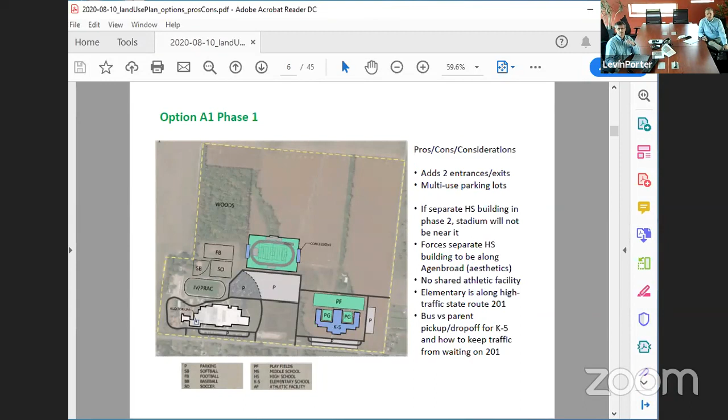The 3 main elements we're looking at in all of these are the K5 school, the stadium, and whatever future area is left over for potential development and/or buildings and athletic facilities down the road. So this is the one where we're putting the school on the northeast side of the site, with a centralized location for the stadium near the existing high school and middle school, and expanded parking. This would be phase 1.

Going into the A1 phase 2 - well, phase 1 you have to remember is basically 10 years. If we get funding in 6 or 7 years, it takes a year to design and 2 years to construct, so you're really looking at 10 years out before you get to that second phase.

So realize when you're looking at these, this is the plan for the foreseeable future, 10 years out. The master plan that shows the high school right now, we wanted to show that as a potential option, just to make sure that if the master plan changes from its current plan of 2 buildings, a K-5 and a 6-12, that we haven't done something to the site that prevents that future high school building from potentially being on site. That's the line of thinking when we're doing these.

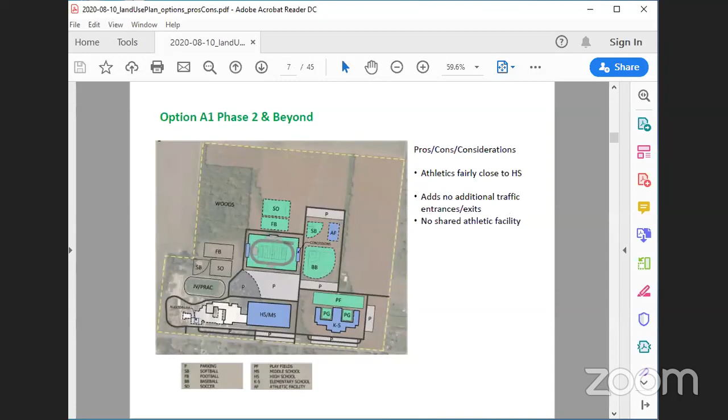But I'm just saying the comments are written a little differently, because putting the concession stand on the end of the football stadium didn't always make it common to the other sports. So the comments are just written a little differently. I just wanted people to know we used the AF box in two different ways.

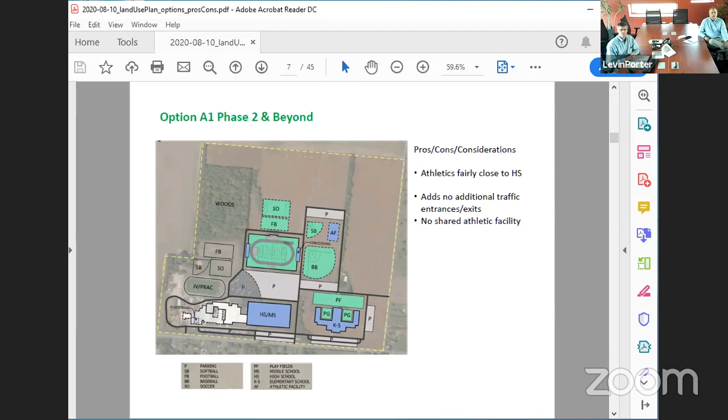Let's look at the A2 scheme. This is the third option master plan, a 3-building scheme. We're showing how the site would work if the high school is located on the northwestern side of the site, still maintaining the elementary school on the northeastern side, and changing the addition at the existing building to the middle school addition, which matches the master plan. So this just shows that no matter what you do in this particular scheme, you still have room to develop the site if the master plan changes down the road.

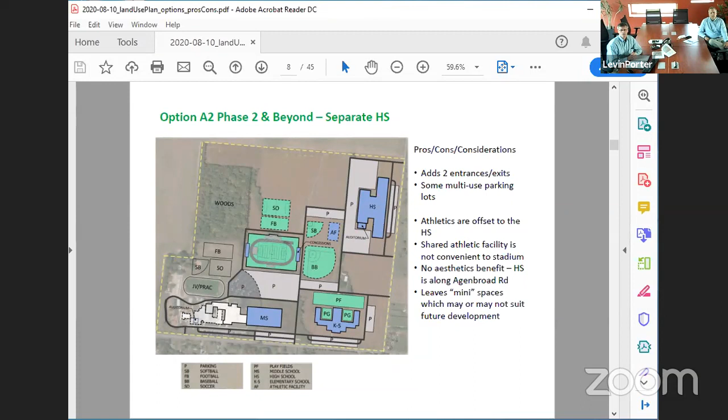Any comments on that one? Okay, let's go ahead and look at the B1 scheme. Did you want to talk about any of the pros and cons we have there, or?

I guess in looking at some of these, like A2 phase 2 and beyond, if our intent is to have our high school soccer team play on our football field, we're going to have 2 soccer practice fields, 2 football practice fields, 2 softball fields. My question would be, why do we have so many facilities? Softball, we don't even have a JV team. Soccer, I think only one of our 2 varsity sports is having a JV team this year, not even 2. But why do we have so many practice fields built in? It seems like a waste of space and money to me.

Well, I think those were put in there as a potential future, just to show there's space to do those kinds of things, and potentially moving them from where they are now so there's a central athletic complex, if you will. I was just looking at it because it still shows them in the existing locations as well. Yeah, that's why everything with a dotted line in that picture is just future. Okay.

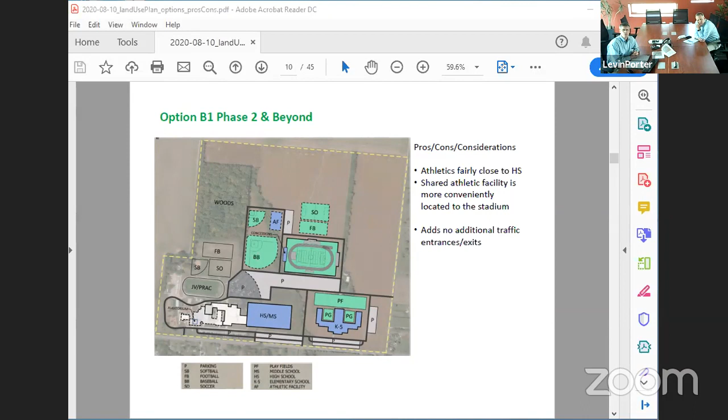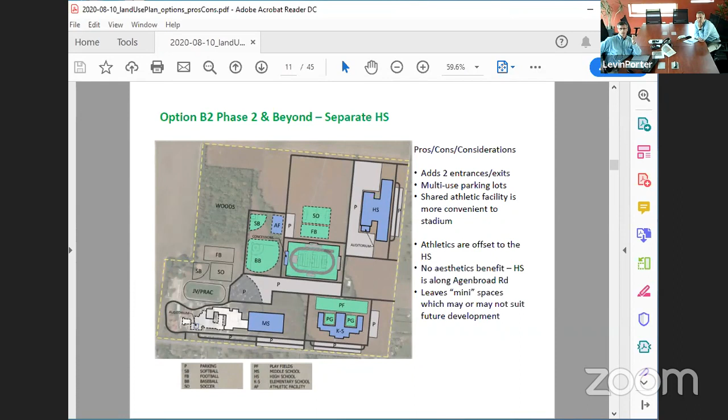So going to the B2 scheme, this one shows essentially that third master plan, high school up in the northwestern corner. Really the only difference is that the stadium has shifted further north, closer to that potential high school up in that northwestern corner. Let's go to the next one.

So the C scheme shows again the stadium, which would be on the corner of Agenbrod and 201. So we're really shifting that one as the focus of the campus. Then the elementary up on the northwestern side, accessed by Agenbrod.

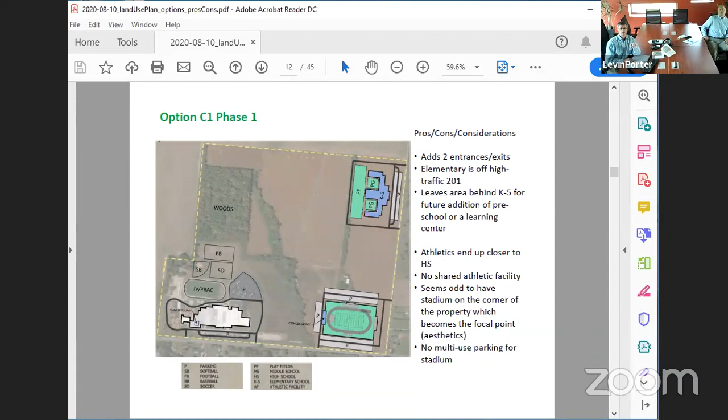And just to understand, this would be what would be on the site for potentially 8 to 10 years until the state funding would be available. As a planning exercise, it really isolates the elementary, which could be good or bad, but shows you what would be on the site for 10 years. As we go to the phase 2 drawing and develop the addition, let's go to the next slide, Brendan.

As we go to the phase 2 drawing, this adds the high school, middle school addition. We still have plenty of room on the site. We're adding the potential future athletic fields in there. There's plenty of room for that.

And then going to the next slide, Brennan, which would be the high school, there's still room to develop the high school. It's a little bit tighter on the site than some of the other schemes, but we could still take some of that parking out if we needed to build an addition onto that high school. We also have additional room down by the middle school for future additions as well.

In fact, all of these schemes are large enough so that we can accommodate some future growth in every one of these buildings. Some are better than others. So let's go to the D1.

Mike asked: if the elementary school's first and it's back in the corner, in the northwest corner, won't that increase the cost for the first project?

It could potentially increase the first cost. What we don't know is what the traffic impact would be on Agenbrod and how much we would have to do to Agenbrod to accommodate that traffic. And looking at the site utilities, I really need to dive into that and figure out exactly where the main lines are. I suspect everything's out on 201, so there'd be some additional development costs related to that.

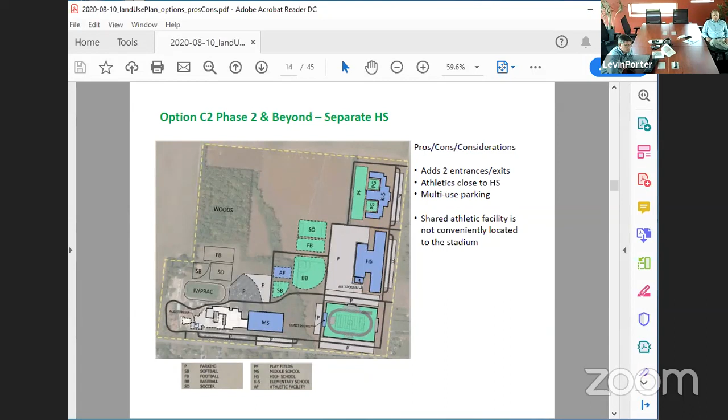Yeah, for the high school. Sure. Yeah, I mean that's a good point, and part of these schemes are to kind of explore all of those different options. There would be, even in this concept, a drive that comes from 201 that you could access to the back of the high school.

That goes along the south side of the stadium. So I think in all these concepts, you'll see that we have access from both Agenbroad and 201 really going to all these sites, because you really want both opportunities to get access to the sites.

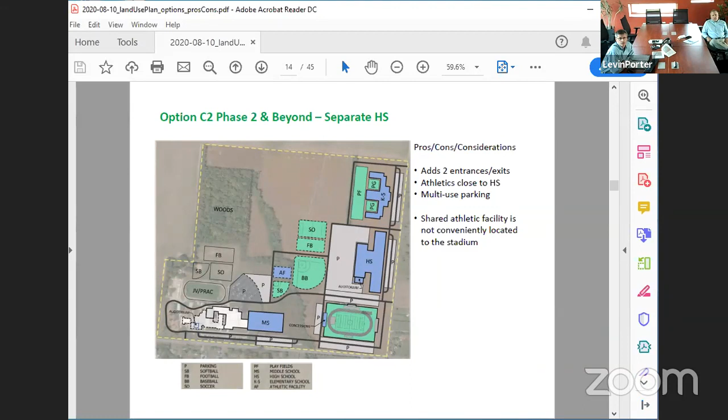Okay, let's go to the D1 phase 1 scheme. So looking at this, we're moving the stadium more centrally located. And this one really impacts the next phase.

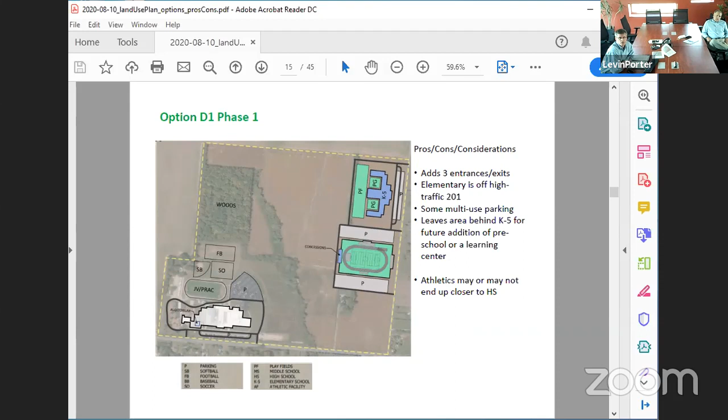So going to the phase 2 drawing. Brendan, can you go to the phase 2 drawing please? Thank you. Our athletic facility built around the stadium. We've got the high school, middle school addition, still kind of centrally located. The stadium, obviously, next to the elementary school. That's something that we need to think about.

And then going into the D2 plan. This shows the high school on the corner of Agenbroad and 201. So this, Lori, might address your comment there, because you've got more direct access to the high school from 201. And there's still room to kind of grow those buildings if needed.

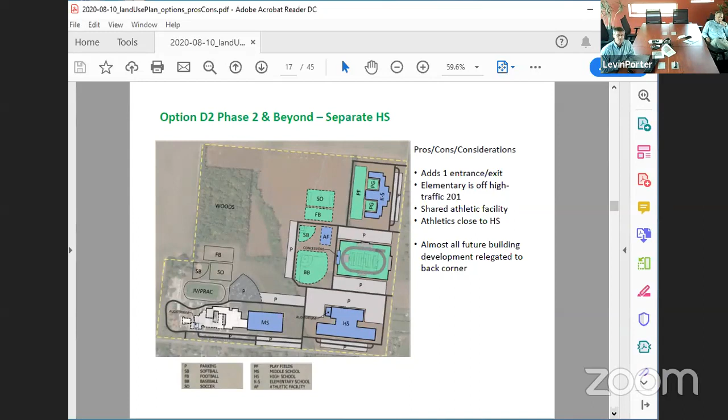So let's go to the E1 phase 1 scheme please. So this puts the elementary kind of back at the northeast corner with the centrally located stadium, or just kind of flip-flopping those two. And then going into the E1 phase 2 drawing.

Go to the next, there you go. Again, we're showing the athletic facilities being developed around that stadium. Lots of circulation, but again, we still have the elementary school on that northeast corner.

And then going into the E2 scheme, showing the high school all the way up there on the north side of Agenbroad. So this is kind of one of those issues that you've got to think about. There's less of an access point to 201 with the high school up in that northwest corner.

So Lori, this one probably wouldn't meet your requirement there. And I would agree with you. There should be some sort of direct connection to 201. So that's the E2 scheme.

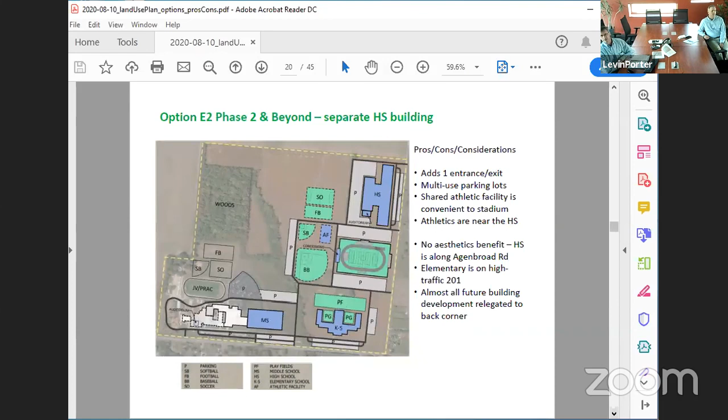And then going to the F1 scheme please. Thank you. This one has the elementary all the way up in the northwest corner, centralized stadium. Going into the phase 2 drawing.

Yeah, next, there you go. Continuing the development around that stadium with the sports complexes. This shows the high school, middle school addition, the additional parking there.

And then it's kind of bisecting the site. So you've got the corner at Agenbroad and 201, and then you've got the area behind the woods and to the west for any future development. You could do a new building back there.

Going into the F2 scheme, this shows the high school again on the corner of Agenbroad and 201. So we've got more direct access and visibility for the high school at this site. You still have room to build, even in the area between the K5 and the high school in this site.

You still have room for another building. And you still have tons of room in the back for development. So this is, again, it's a pretty flexible scheme.

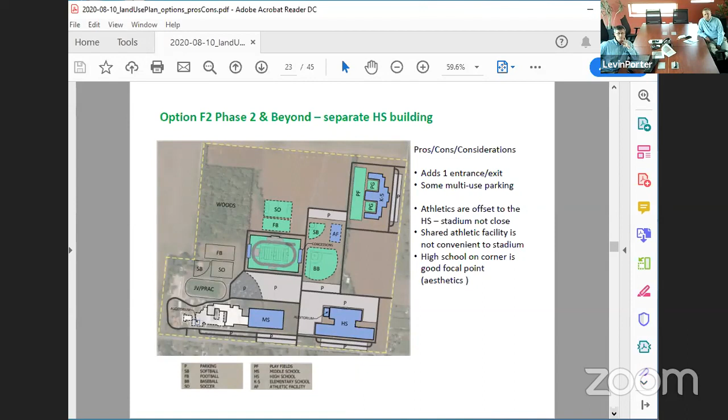Going into G1, these are schemes that were developed by Chris and Julie, and I think just kind of looking at other potential options. Chris and Julie, I didn't know if you wanted me to go ahead and describe these, or if you wanted to talk to them. Go for it. Oh, go for it.

Okay, so here we have the stadium kind of still shoved a little bit north. And if we go to the phase 2 drawing for G1, again, the athletic facilities developed around that stadium. We've got plenty of future growth for the high school, middle school addition.

And then the corner of that site would be reserved for any potential high school if the master plan changes. And again, the west side of the site is still open for development. So going to the G2 drawing, there's the high school and how it would sit at 201 and Agenbroad. So I think there's plenty of access for the stadium, plenty of access for the high school, and plenty of room for future development.

Going into the H1, this puts the elementary school all the way back by the woods. The issue that I think we're going to face with this one is the development costs. This is basically almost 1,500 feet from Agenbroad and a little bit more from 201. So I think the development costs related to the utilities is no small factor for placing the elementary school here.

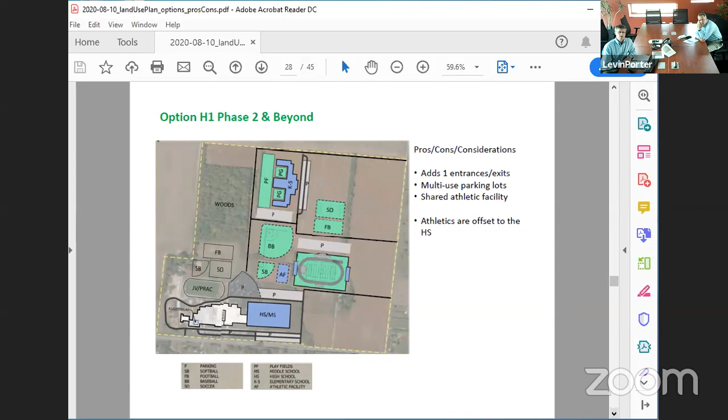We've got plenty of room for development on the north side with the high school and middle school addition. Going into the H2 drawing, that would be the high school again on the corner of Agenbroad and 201, which leaves enough room on that northwest corner if that wants to be developed, or if Julie has some land use studies for a possible sale in the next few slides.

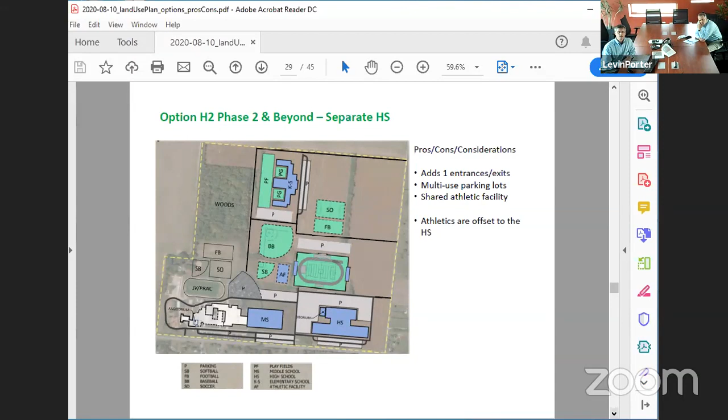Going into the next slide, this is the I1, phase 1. This puts the elementary right on the corner again. The stadium's moved a little bit further to the east on the site. Lots of room between the existing building and the elementary.

Going into the phase 2 drawing, continuing the development of the baseball fields, the softball fields, potential athletic facilities around that stadium, with the high school kind of smack dab in the middle between the middle school and the elementary school.

This one is a little bit tight. When we put all of that stuff along 201, I think we really need to consider carefully any potential future growth of those schools. There's a little bit of room to move, but not much. So for this particular scheme, I think that it's a little bit cramped and may not be as flexible as some of the others.

That's an interesting question at the end. Can you tell us about that? I'm sorry, can you repeat that, Danny? That's an interesting question on the bottom of the previous slide, wonder if you could tell us about that. If we connect the middle school and the high school with a hallway, does it count as one building? Yes, it would count as one building.

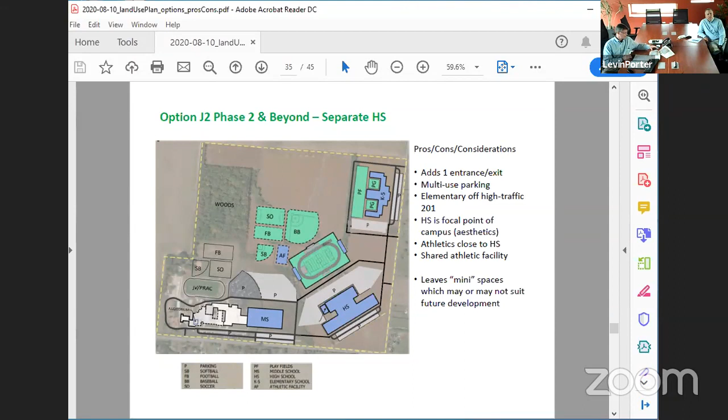Excellent. Yeah, I think the next slide is related to the land use. Julie, you want to talk about it? Yeah, I'll do it.

Okay, so this came up a bit - if we want to set aside some of the land to potentially sell it in the future to fund some projects. Not saying you have to do this, this was just to create a visual to show you what it could be like. So here's some of the statistics.

This is current information. Currently, the zoning requirements, you have to have 175 feet of road frontage and a 2-acre minimum. That's for any property with a septic. There is what they call planned development, where it doesn't have to be that, if a developer would come in and put in streets and water drainage and everything, a way to handle the sewage and the water and everything.

So it'd be similar to the carriage trails thing, right? Then the requirement goes away. But this is for a house with a septic system. So minimum size 2-acre lot with 175-foot road frontage would be 498 feet deep.

So according to the Miami County website, the Agenbroad Road frontage is about 2,560 feet. So if you divide that by 175, you can get 14 lots along there with 110 feet left over. Not to say maybe you wouldn't put 14 in there or sell 14, because you might want to have some roads, or maybe they could be put in the 110 feet. So again, this was just in case, in the future, we didn't want to prevent the option, or just to leave open the option of possibly selling it.

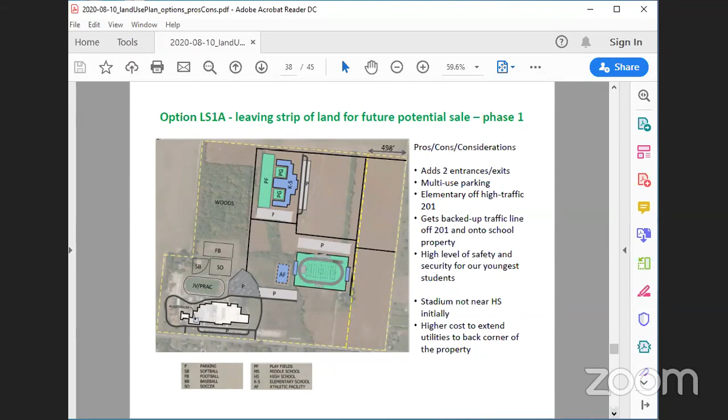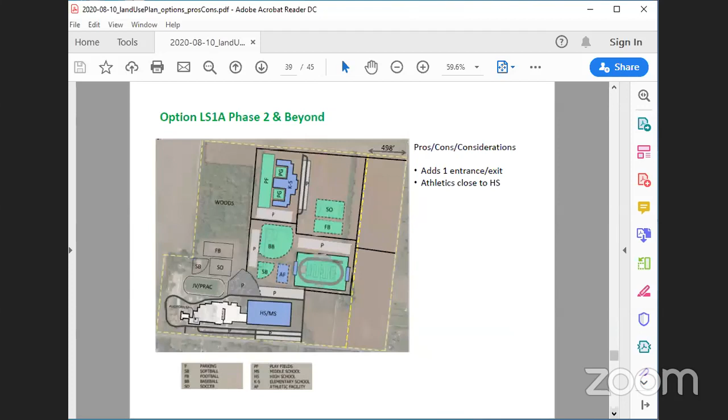So this first option was putting K through 5 in the back, and then go to the next one please Brennan. Stadium in the middle - this kind of mimics the first couple that they showed where the athletics are in the middle, it's just pushed back off of Agenbroad Road. And if you go to the next slide, it would mean putting the high school in the corner on this particular drawing. And then there's a couple more options.

The next one is moving the K-5 up to where it would not be road frontage, it would be probably the back of potentially some residential. Just so you could see how things fit if we did take that, or if we did leave that land empty for now. And if it was never needed for another project, we could also do future development or athletics on that particular space.

And just so you know - did you get the numbers for this? So the land today is selling for about $40,000 an acre, which would be around 1.1 million at today's dollars. So the block of land that's blocked off there, that would represent that amount. Could go up - well, we figure land's going to go up, right?

So this design here was changing the elementary to face inward, rather than the back, if it was sold it could be the back of a residential section. So just changing it to overlook the campus rather than the backyards, with a potential future building next to it. So again, just to show some different options.

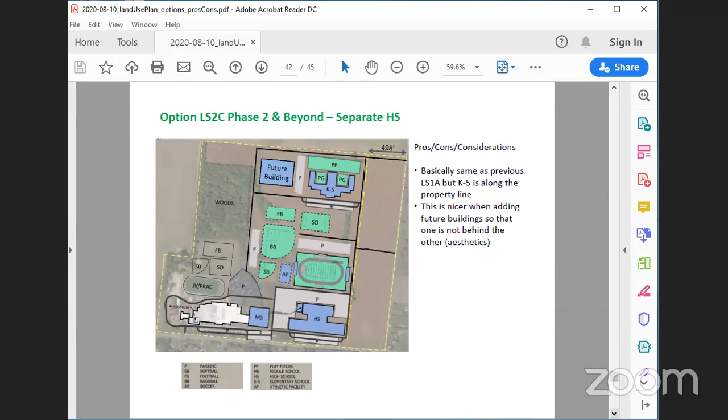The last one was just those two swaps, same thing with the elementary back in the corner.

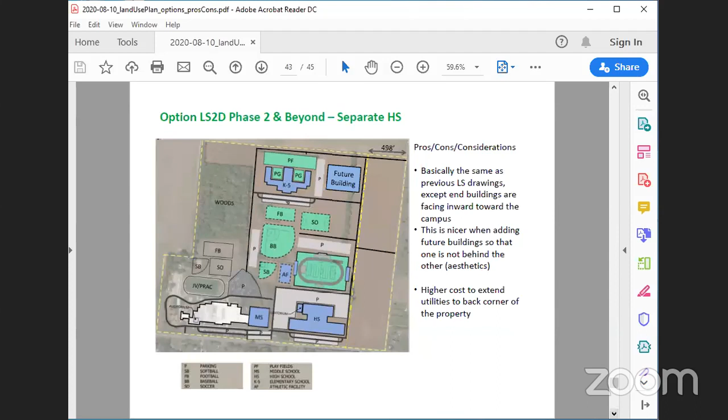So the next steps we figure are to narrow these down. So if there's any you really hate, we can start throwing out the ones that people don't like or we feel don't meet the criteria. Maybe we don't want to spend the extra money to put the elementary back in the corner. It gets the kids off the road, but there is a cost.

Maybe it's not eliminating options, but based on the different designs, I'd like to see the high school in the northeast corner, a bit more central, so that if we can't fund it in the future, we'd have that one building via the hallway, and then the K-5 in the northwest corner, again a bit more central.

Central and north-south orientation to allow for future expansion there. And then the stadium more or less in the center of the entire complex, just slightly to the north. I think option G or H or something along those lines showed the stadium in a good spot.

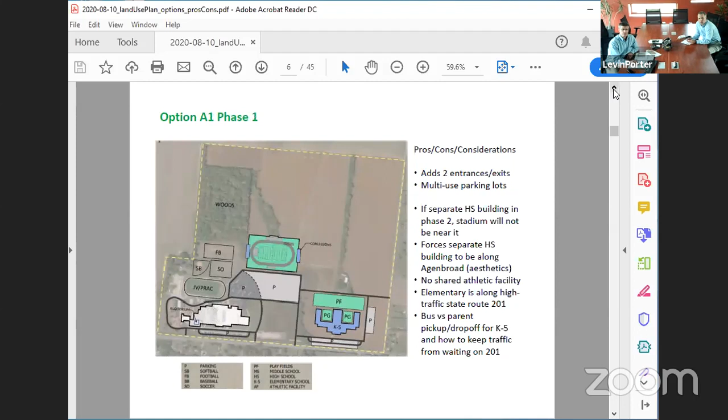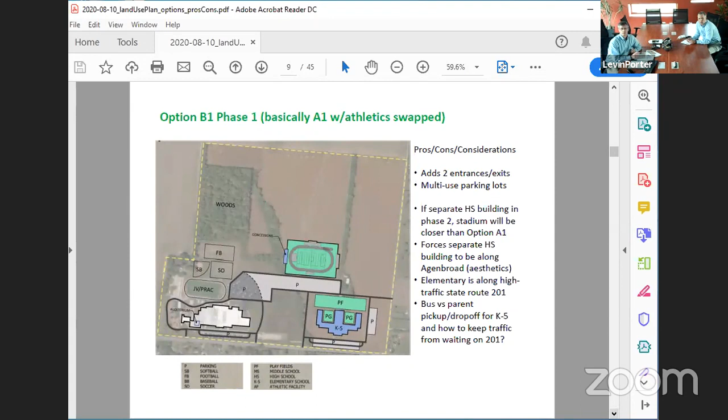It should be A, B, F, G, H, and I - those are the ones that have the stadium kind of in the center. So if we start with A, that shows the stadium basically right to the north of that existing parking, with a little bit more. B shows kind of the same thing, just moved a little bit farther east. And then F, G, H, and I are basically variations on that same theme.

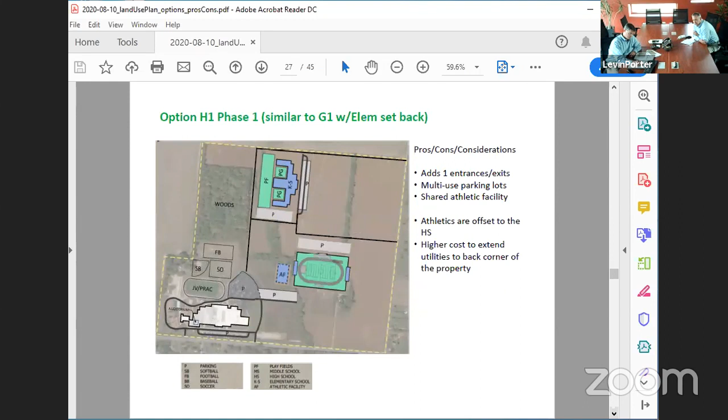Yeah, F and A are really the same concept - it's just the elementary and high school locations swap. And I think G and B are the same thing, again with the two schools swapping locations. So depending on your preference of whether you want the K-5 in the northwest corner or the northeast corner, the high school is in the opposite corner.

Guys, how confident are you that we'll need a new high school at that point? You never know - it depends on the growth in the area, and you just don't know. The enrollment projections for the high school that they've got calculated, I think, get close to double the size you have now, and that's because you've got a bubble of 3 or 4 grades going through based on their enrollment projections.

That in 10 years ends up in the high school. So if you let that play out for another 10 years, I'd think those numbers come down a little bit, but I don't think - unless you've got a large influx of students not accounted for in this enrollment projection - I'm not sure the enrollment projection is going to, at that time, trigger a new high school.

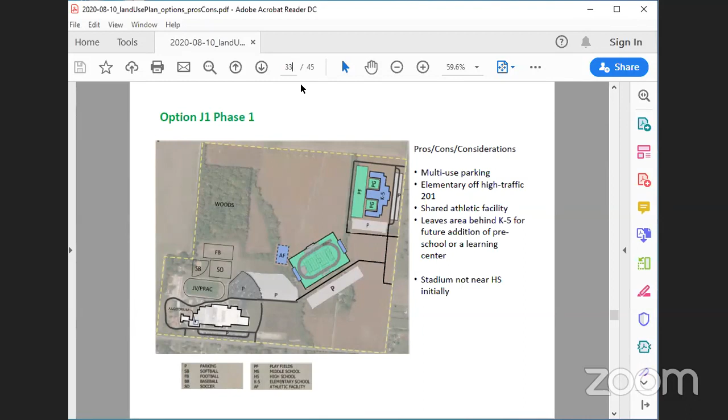Right, and that's because they progressed them from grade to grade. And if you go by the trends, it wouldn't be as many students. So if you don't have that many students, it's a worse case for having a separate building. Yeah, if you follow their logic for the high school students, typically when they do those enrollments you'll see a decrease at the high school level, whether kids are going to a Catholic school, another district, maybe for sports, or a career center. We'll pick off some too.

Usually you see the high school numbers drop off a little bit from kids dropping out of school, but in this case they've really retained everybody that's gone through, and I think that's probably because of the growth aspect of the district. But I wouldn't be surprised if you didn't hit some of those levels, just because it assumes nobody leaves the district, and that's usually hard for that to happen.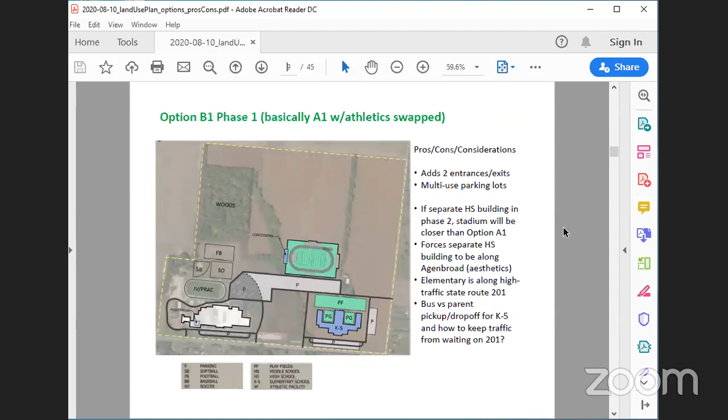Well, because it sounds like we already eliminated some. Bring up, Vernon, can you bring up B again? Was that the one in the middle? I think the one that Caleb wanted was G. Yeah, for G we're kind of probably leaning that way. They'd have the field slightly to the north. Yeah, G would be where the schools are, where he was talking about, with the track in the middle, and F was just the field farther to the south, more to the south.

F is the stadium and ball field flipped, with the same location for the K-5 and the high school. Can you go to the next slide? Sorry, Johnny.

Mike and Mark, are there any differences in your mind between costs for G, either F or G with the stadium location? I know it's flipped, but what are some of the benefits or drawbacks from stadium location on those two? I don't think there's really that many differences between F and G regarding the stadium. I think the costs there are pretty much the same in terms of development. It just puts you a further walk from the existing building to the field and to the locker room, so that's the downside of it. It moves everything further north.

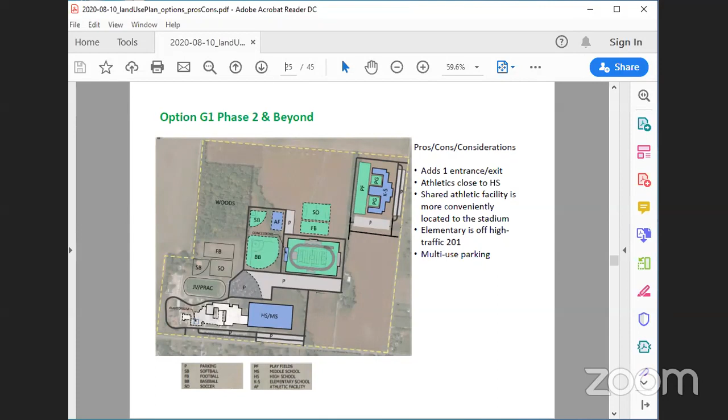Which option was that? F. Yeah. And then for reference, if that came to fruition, okay, with a high school in the northeast, can you go to I?

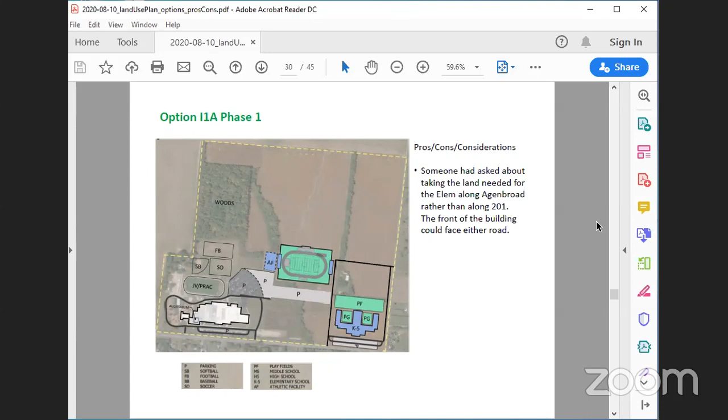No, not building as I, the high school - I think it was I2, yeah, that one right there. So if you ended up building an additional building, I think that might have been what Caleb was saying as well - a building that could or couldn't be connected with a hallway.

I thought he was saying he wanted K-5 in the northwest, high school in the northeast. All I'm talking about at this point is the stadium. Yep, the K5 could go up in the top right corner as well.

That stadium is the same as G, not as F. Right, because there's ball fields to the south of it. I think with F or I that we're looking at here, I don't know if we necessarily have it on there, but maybe just moving that stadium to the location of F and keeping some of the other stuff the same there as far as the high school location.

The high school doesn't have to sit completely on the northeast corner there. It could slide down a little and be more centrally located. So putting the athletic fields to the south, based on what we have currently and what we'll have in the future, makes sense to me.

Well, looking at this, I think we want to stay away from what we've had ever since this school was built - everything's all jammed up in one corner, and this looks the same. This looks like it's all jammed up in the front. Well, they still want the K-5 building up on the... well, in this one, I'm just saying - no, they don't want all three buildings altogether.

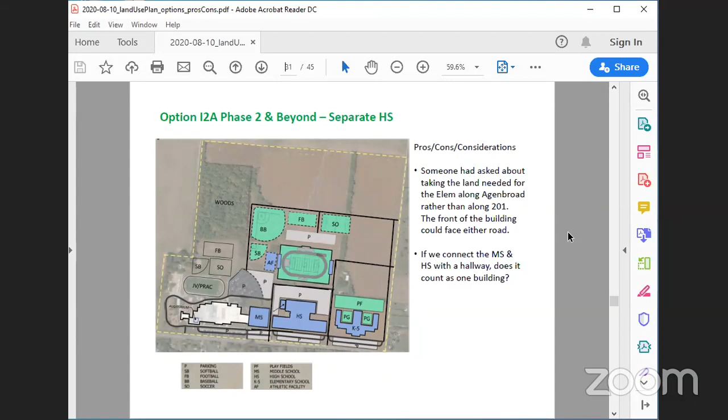Well, maybe the I, don't know, next one. I really like the one where it was turned on a dime. Oh, that was J - if you go down a couple, you'll see the one. I mean, if we're talking about the distance of a baseball field, we're 300 feet north or south - is it even gonna make a difference?

You don't like that one?

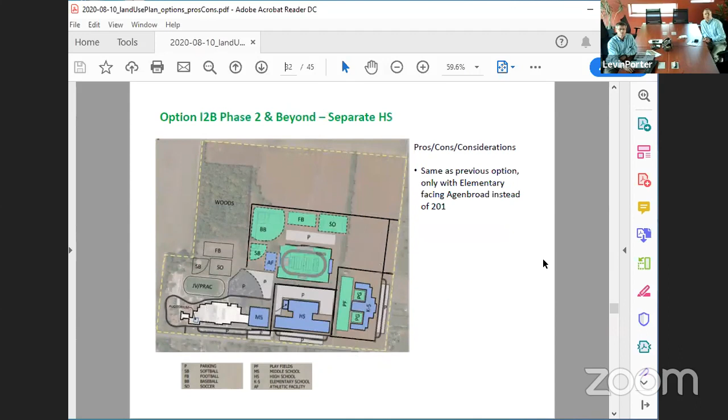Okay, then G, then you go back to G. Well, go back to F. Look at the difference in the parking lot design. Are we gonna be happy with G, that long skinny parking lot? The parking makes more sense to me like that. You're gonna be able to fit more spots for your square footage.

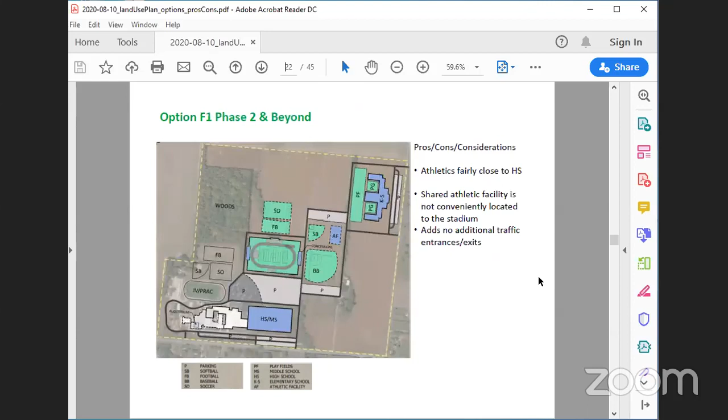That requires us to turn the corner, I would say. And the fact that it forces us to move the next project or facility west, and the elementary sitting there on that piece really would kind of pull everything together with the ability to move around, even the track and athletics. I'm not saying the stadium that way, I'm just saying if we kind of looked at it with the elementary right there where that high school building is, I think that would possibly allow us a unique opportunity to take a look at that.

So the only thing is that everybody so far has said they don't want the elementary on 201. And that would mean that if we did get a high school, it would be up on Agenbroad. The biggest issue is how we set that road, set backwards off 201, but if the traffic flow was off Agenbroad, it would primarily be off of Agenbroad. Well, you can't force people to take high school traffic up on Agenbroad.

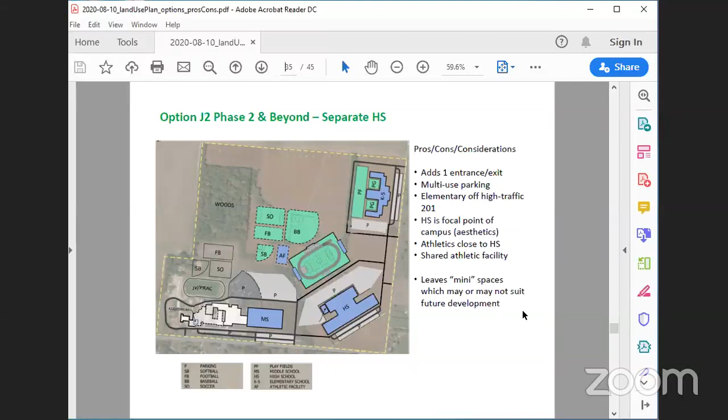And if we do B, the stadium on either A or B, the high school could still sit in there like it does on J. We'd still have that corner. It could go in there at an angle.

Well, A and B show the elementary on the corner, on the Agenbroad 201 corner. Is this what you were talking about, Jacob? Let's just have that. I was talking about having an angle, okay.

I was thinking sharing parking spaces connected would allow for meeting all those different needs. However we do it, you gotta figure out and break down all these choices because there's positives and negatives to every one. Hence the list, thought I'd throw it out. I really like the idea of the building sitting at an angle.